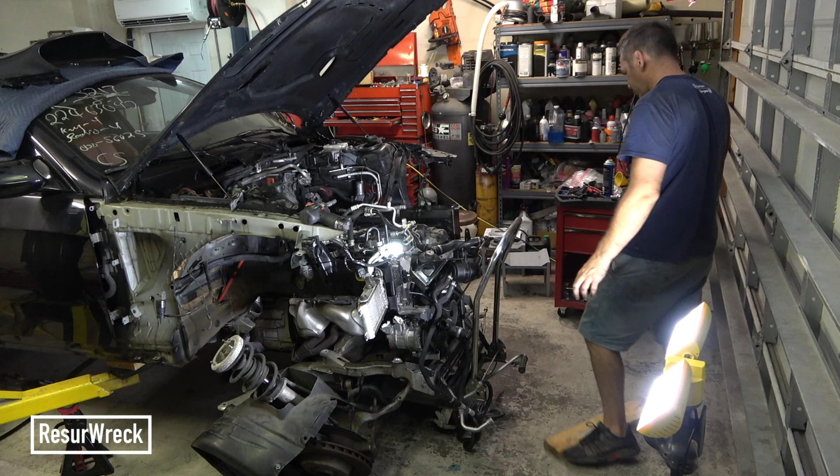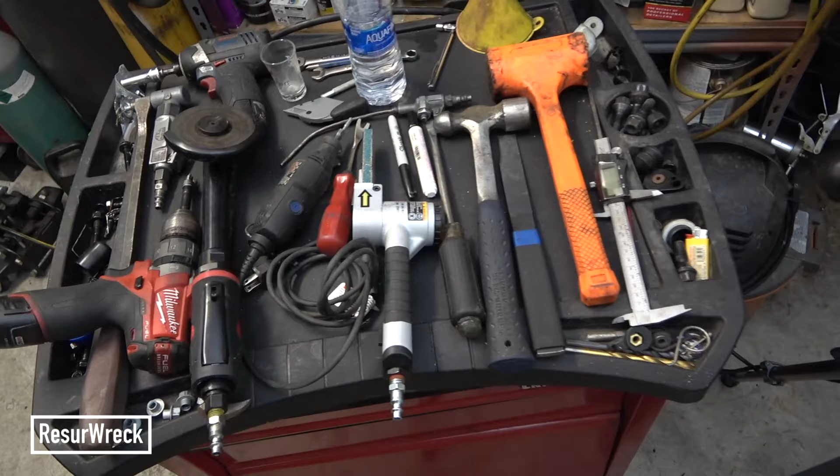So here are some of the tools that we'll be using today. Some of them are just general tools—you'll immediately know what these are. Some we've already talked about in past videos, but originally I wanted to use other types of grinders and cutters for this procedure. However, some of the cutters won't allow you to access certain points on this frame, so we're going to be using this longer reach cutter instead, which is great for body repairs and lets us reach certain points the others can't.

We're also going to be using a Dremel with a cutting disc, because sometimes you really need tight, fine cuts in areas you can't get anything else into. And we're going to use this belt sander or belt grinder, which is great for removing spot welds very quickly. However, you wouldn't always want to use something like this on every spot weld—you'd use it on parts you don't care about, trash parts. If you care about the spot and want to reuse a certain part, you'll want to use a drill with a spot weld cutter, or a regular drill bit, but I prefer the spot weld cutter.

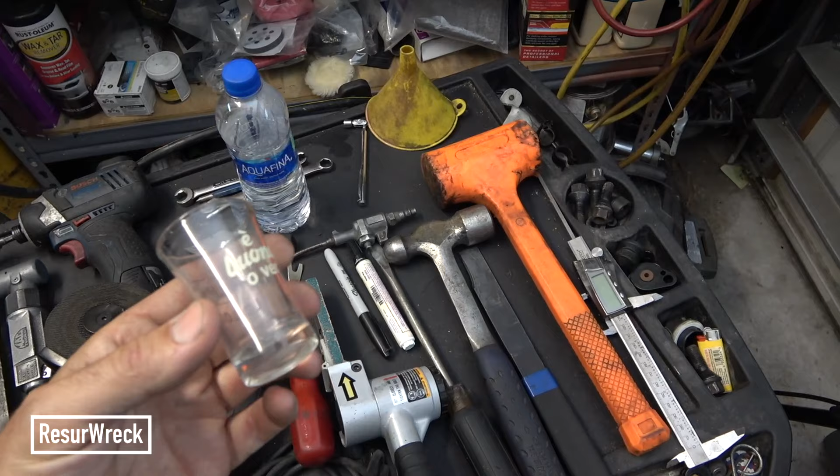The shot glass is in case things go wrong and you're just going to start drinking profusely, and the water is so you can feel better the next day.

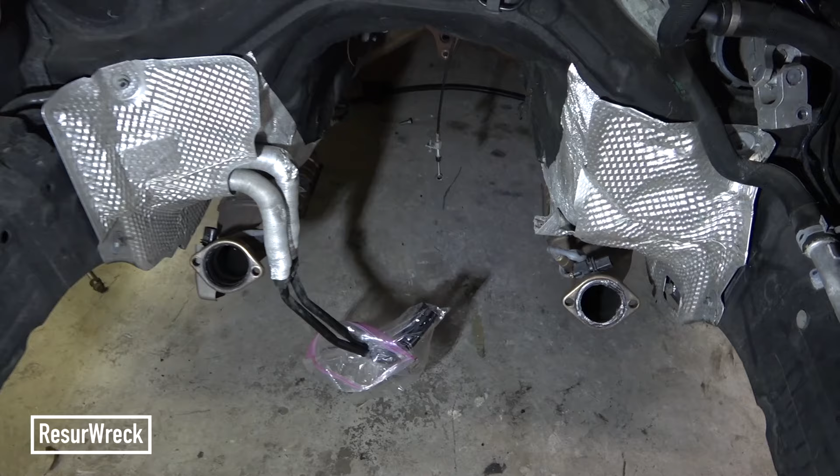Alright, so with the engine and drivetrain removed, you can see what we're going to do. We're going to remove these frame rails. There was some bulging here that we couldn't get to, and this probably could be repaired. However, it's just better to remove these frame rails altogether with the kind of damage that we had.

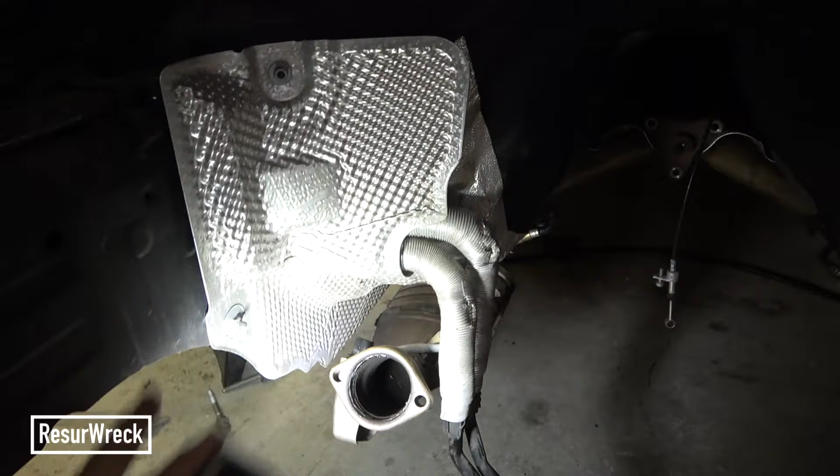We're going to section them all the way to the firewall. There is a point where we can cut right here. We're going to measure out that accurately and trace it out where we're going to cut. We're going to cut through the first layer, and leave the structural component underneath so we can weld the new frame rails onto that. So we're going to have to remove a lot of things here to get to that, and remove some things here to get to the spot welds.

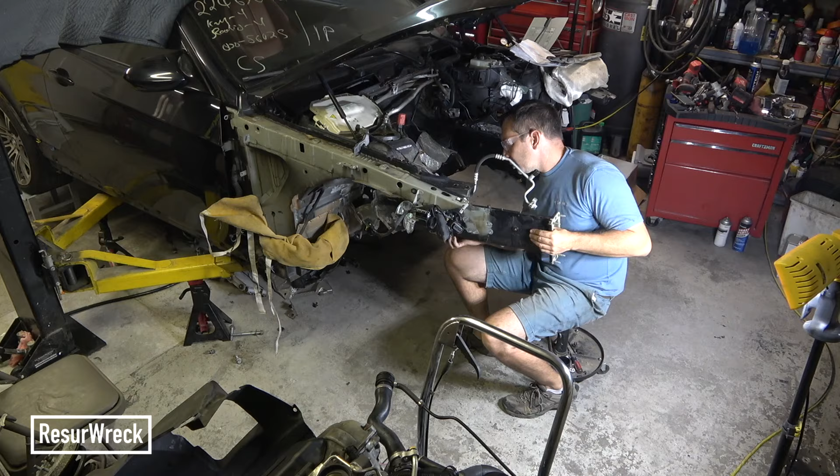So we're getting the frame rails in position, just doing a test fit right now, and I just want to make sure that they fit in the right spot before we weld anything in place. Of course, we're going to measure everything out and make sure those frame rails are in the right position by using the frame alignment system.

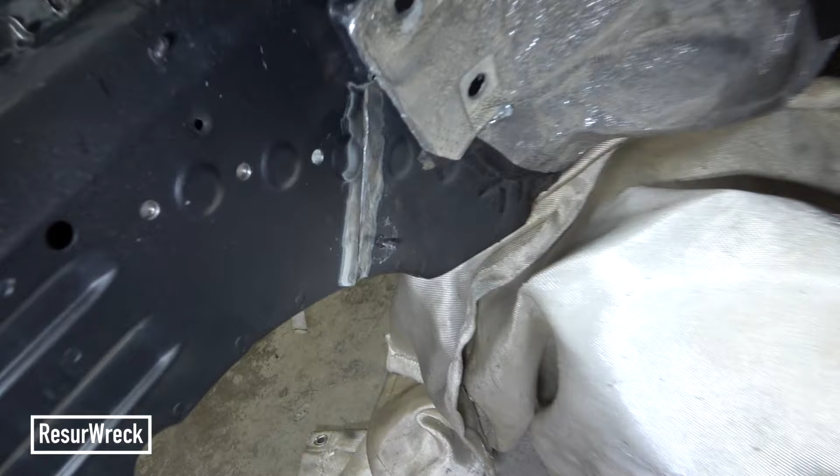So you can see right back here, those are the seams. That's the sectioning point specified by BMW, and behind there is a reinforcement plate, so that's strong. Then all of these will have to be welded up with rosette welds.

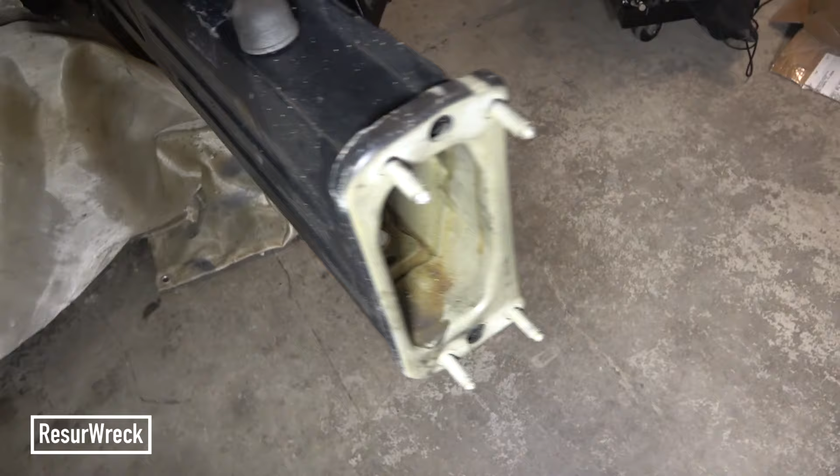Same goes for over here. See all the welds. They've been stripped down to bare metal, but we'll have to coat them all with weld-through primer.

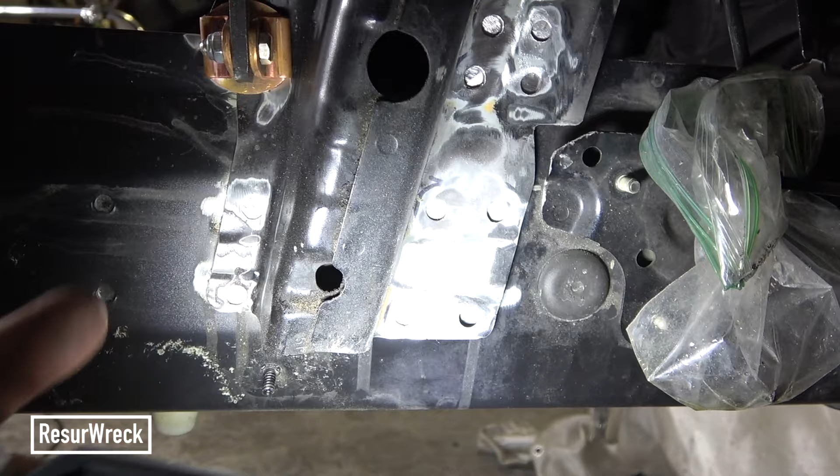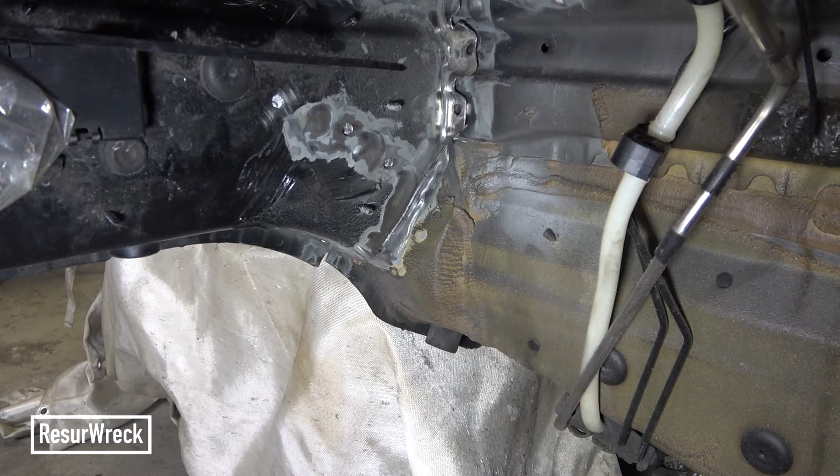All the hidden areas, like behind here, underneath here, will have to be coated with weld-through primer, as well as this spot you can't get to later, with the good quality black primer. We'll use a lot of weld-through primer, and then in the end we're going to use some cavity rust sealer type stuff. It's like an oil that goes inside the frame rail and prevents it from rusting.

Over here, same thing, same spots pretty much. We'll weld them all up and coat it, seal it, and this thing will be ready to go.

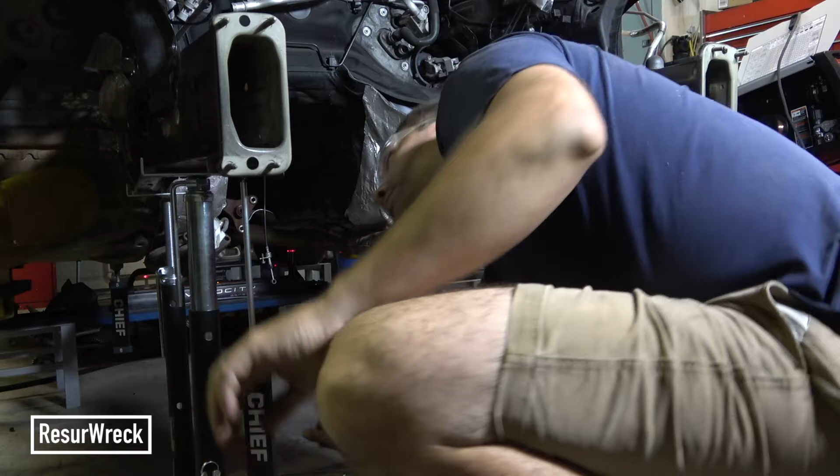So we have the vehicle as level as possible. We have the jack stands under the lift there to make sure the lift settles at the same exact point. We've checked the levelness of the car with a couple of levels, and we've shimmed it so the car is as level as possible.

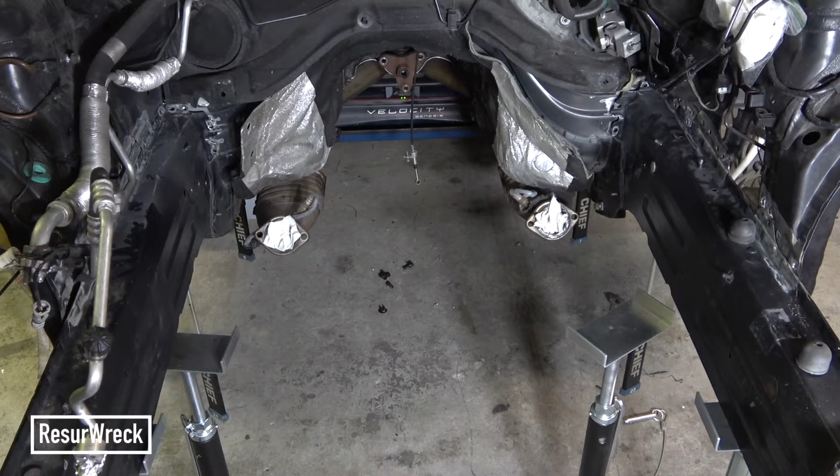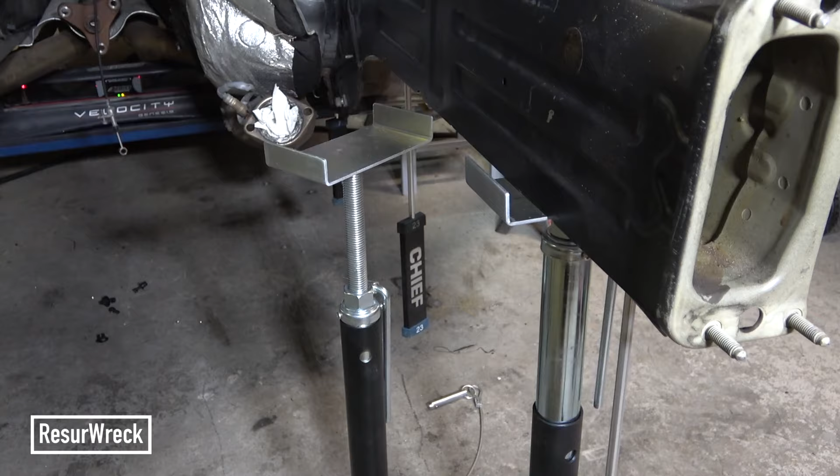Now this is more critical if we were just relying on measurements alone, but with this frame measuring system it's not as critical that the car is completely level. But we've done that just to be sure, because I do want to double check all my measurements and not just completely trust this measuring system.

And then we have these RV support lifts that we're kind of using as a jig to set up the frame rails in the right spot, so we can move them up and down and just get them in the right spot before we tack them in.

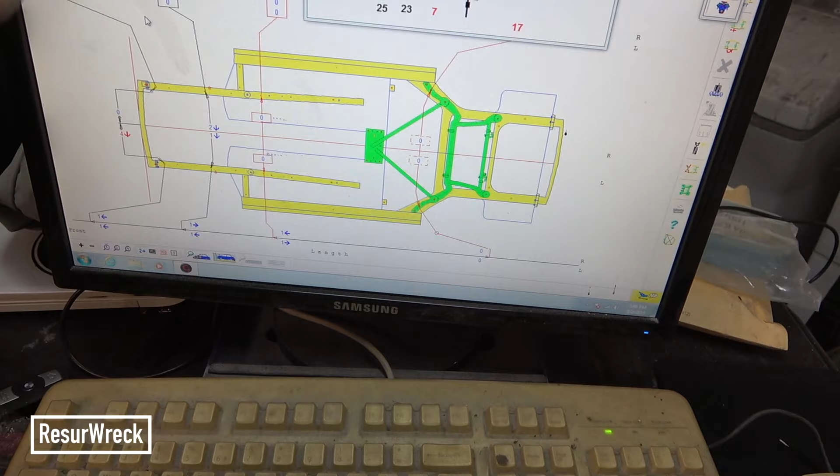Everything looks pretty good. Everything is within spec. The furthest out of spec I am is I'm down by 2 points here, but that's still within spec. I got everything zeroed out to zeros and ones, and as you start welding, the metal will start expanding and contracting and it'll start moving.

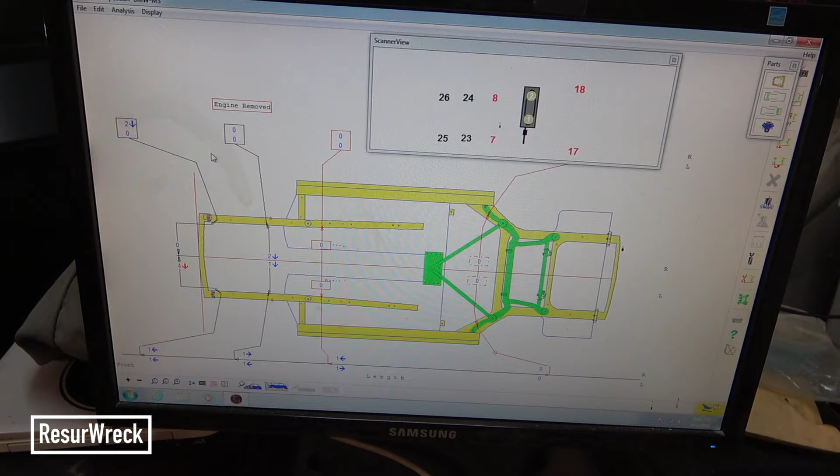So in the end, things will kind of move around a little bit, but the goal is to get it as aligned as possible before you start welding, and then keep checking it as you're welding to try to keep that rail in position, because really every little thing you do, these numbers will change.

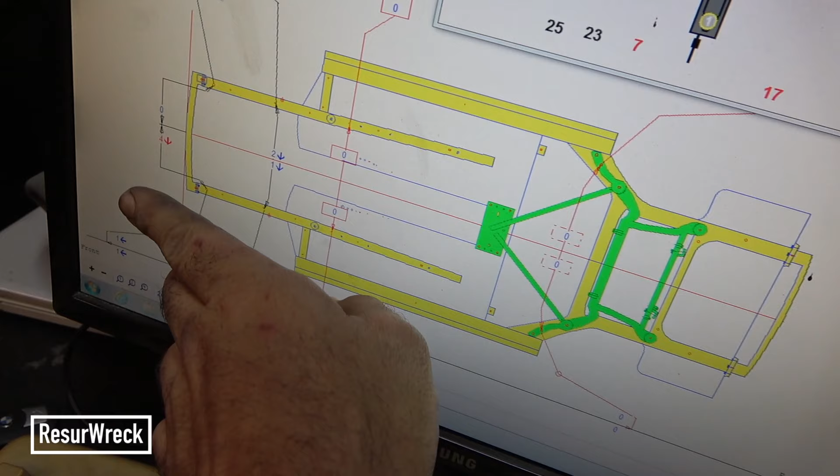So right now the left side rail is pretty well aligned. The only thing out of spec here is the rail is turned to the left 4 points, or 4 millimeters, and the goal is to get everything in blue and as close to zeros as possible, sometimes ones or twos, but as long as we're within spec, I don't have any reason to believe this car won't line up right.

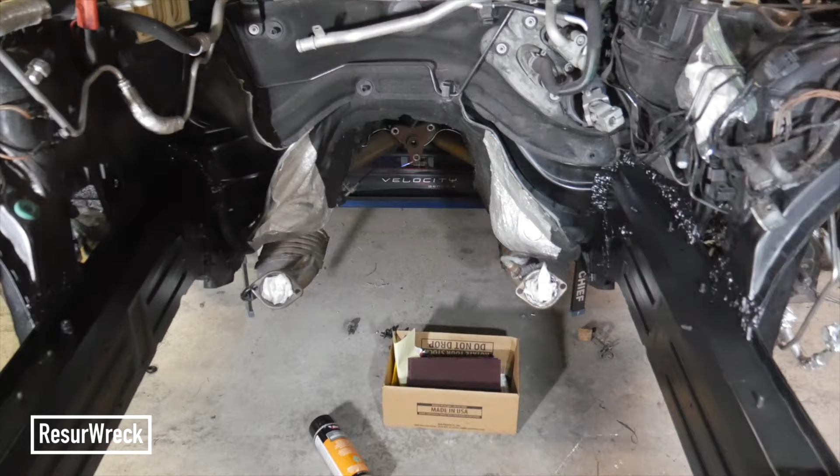Guys, so there you have it. So far, all we have left to do is put the drivetrain back in the vehicle and reassemble this car.

So the drivetrain and the engine is going to go exactly where I'm sitting right here in my temporary frame rail throne that I'm sitting in. It feels quite good. So I don't know, maybe I'll keep the car like this, I don't know.

But probably I'll put it back together because I'm sure you guys want to see the finished product. So I'm going to put it back together now.